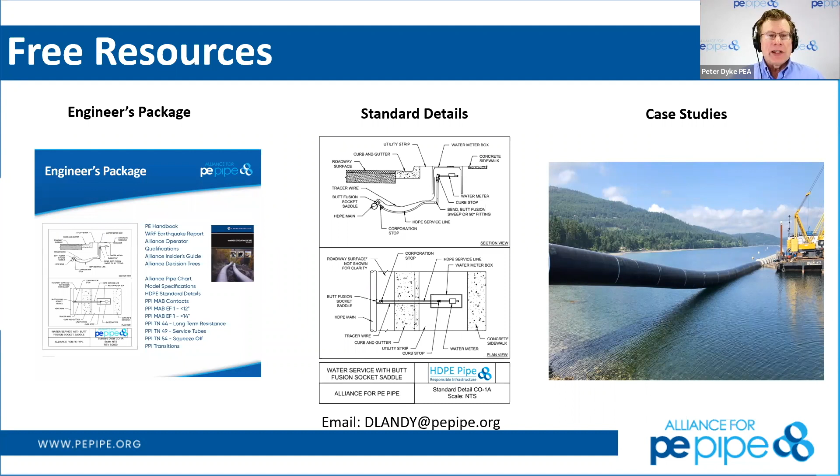Way back from New Zealand as we speak. So today, Mike James, please come on officially.

I'd like to introduce you as a VP with ISCO Industries, the largest distributor of polyethylene pipe. I'd also say, Mike, you're the largest fabricator of polyethylene pipe in the United States as well. Yeah, we have about 10 fabrication shops around North America where we fabricate structures and fittings, as well as all the pipe that we distribute and the fusion equipment to go with it.

How would people and why would people interact with you and your sales team, Mike? Just give us a for instance of your role in this whole process.

So we're obviously hyper focused on HDPE piping systems, and we provide a total piping solution when it comes to your project. If we can engage with the engineer early on in a project, we can add more value early on. We can help you with the technical side of it, the specs, the design of it. We're not going to stamp things for you, but we'll help guide you on what's available today for that. Then we'll walk you through the whole production side of things and the supply side, as well as when you have to get it installed. We have lots of contractors we work with that we can refer, and we can educate them as well. We can provide fusion training services. Our job is really to make sure that the right pipe gets designed and installed correctly all the way through the whole process.

And you know, there's a place like Jackson, Mississippi. Peter, did you see the news today on that? 5 million gallons per day leaking. I hope they're on this call. We need them on here as well.

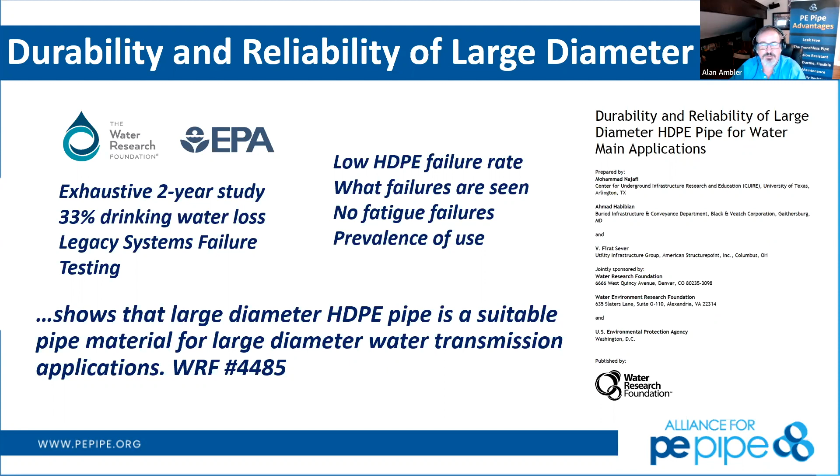You may say, well, this stuff sounds good, but is it really reliable? Richard Kolosik, could you come on and tell us about one of the ways we like to distinguish ourselves, Richard, compared to PVC, since it's the other plastic pipe. PVC is a good product, it's not as good as ours, but PVC suffers from cyclic fatigue. So you hit it, it's like a pitcher's arm. You hit it, throw so many pitches, eventually the arm's going to wear down. Same thing with PVC, Richard.

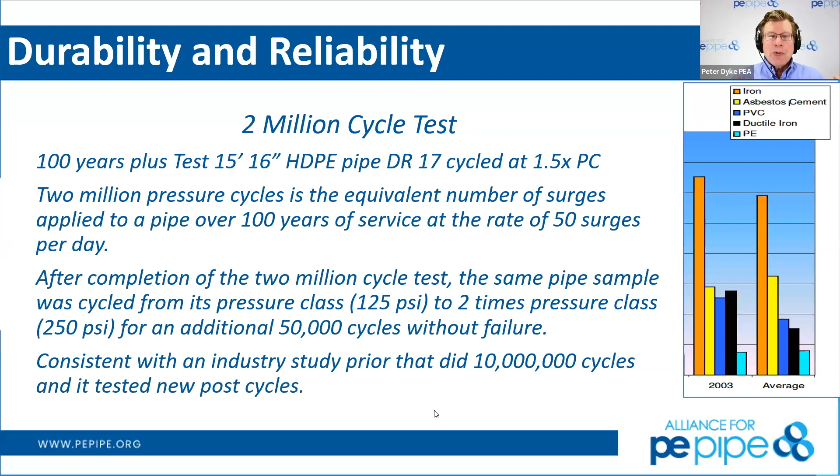But it was all completely done with zero failure, so we had to stop the test because it was just getting really, really expensive. I think it was about a $250 cost per site or per sample. So it was a little spendy, but it really told us a lot.

And with other products that were tested, there was failure. The rigidity versus ductility differences between the two really emphasized itself in this test. So it gave us the confidence to put a multiplier, not a reducer, for surge effects.

So Richard, a mid-sized 250,000 person city, how many cycles would they see in 100 years? Probably what they would typically see is about 500,000. It's 54 cycles a day is what we averaged across the utilities. We surveyed 435 utilities and had an average number of about 54 cycles per day. And it depends - if it was a tower system or a pumping system, that was reduced for a tower system type application. But you can do the math yourself for 100 years.

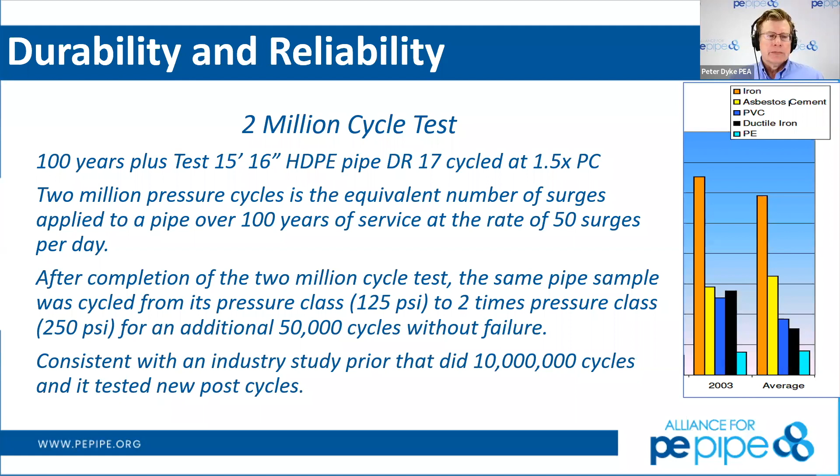Next slide, please. Thank you. All right, so Alan, why don't you take over here for a couple of slides and talk about design that leads to the durability and reliability of the product.

Sure. So some of the design aids that we have available for you - Pete mentioned the engineer's package previously. AWWA has a water main, the M55 manual, for all things high density polyethylene pipe. There's also ASTM standards. A lot of those references are included within this engineering package we've got, but there's lots of guides for you to utilize, whether you've never designed a high density polyethylene project previously, or if you have a whole lot of complicated installations requiring additional information.

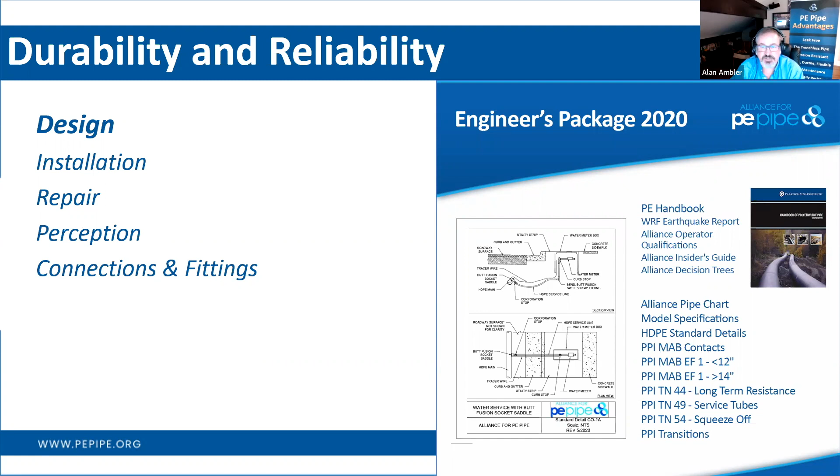So some of the Bible of polyethylene pipe happens to be the Plastic Pipe Institute Handbook on Polyethylene Pipe - 16 chapters covering everything you might want to know about polyethylene pipe, including material properties, pipe and fittings, how those are manufactured, and design of the underground system. We even get into above ground applications, looking at thermal properties and restraint and the strain or stress that may develop in the pipe wall at those restraint locations as the pipe undergoes thermal expansion through heat during the day or changes in weather.

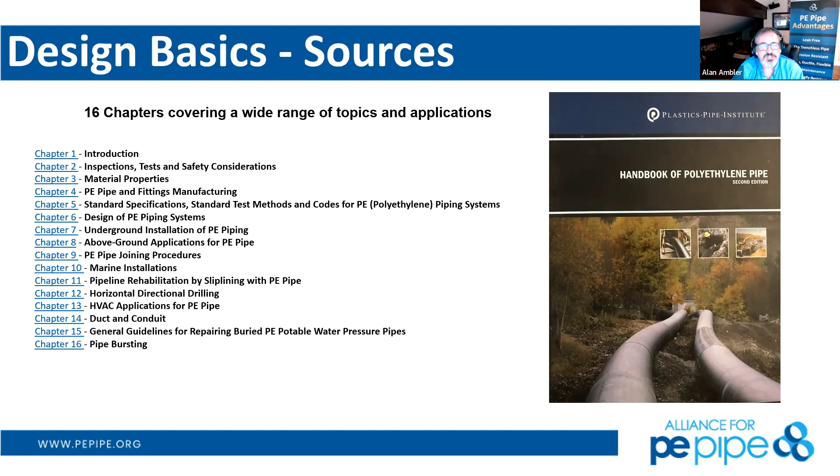Marine installation, slip lining, horizontal directional drill, pipe bursting, and all sorts of other things. So the Alliance itself maintains additional spreadsheets that can be made available to you. We want to know a little bit more about your project before we turn over a calculator to you, so definitely make sure you send us a note and include us in the development of your polyethylene project as we go.

One of the most interesting things that Pete and I have discovered over the past several years is historically trenchless technologies such as horizontal directional drill were one of the gateway drugs, so to speak, for polyethylene use at municipalities - just a first introductory use if you've never been able to use polyethylene in your system before.

But over the past couple of years, we've started to hear more from you in the audience as to what your projects are, and open cut has become an overwhelming installation method for you. So we've put together a simple design window for you.

So if your pipe is between DR7 and DR21, has an approximate burial depth of 2 feet for no H20 loading - that's a box truck loading - or 3 feet for regular live loading condition on top of it, and then buried down to a max height cover of 25 feet, this is an approximated design window corresponding with the new M55's basic installation method. There are other installation methods for which you'd look at an engineered method.

M55 will help you walk through that, but we also have calculators for going to deeper depths or thinner wall pipe as we move through that.

As you start to incorporate larger diameter pipe, remember the footprint on everything expands. So if we're looking at 48-inch pipe, we want to make sure we've got the appropriate trench width and trench stabilization as we go through, which is oftentimes more important than the distance for the pipe itself, because we want to make sure that trench is safe and supported for the workers getting in and doing that work.

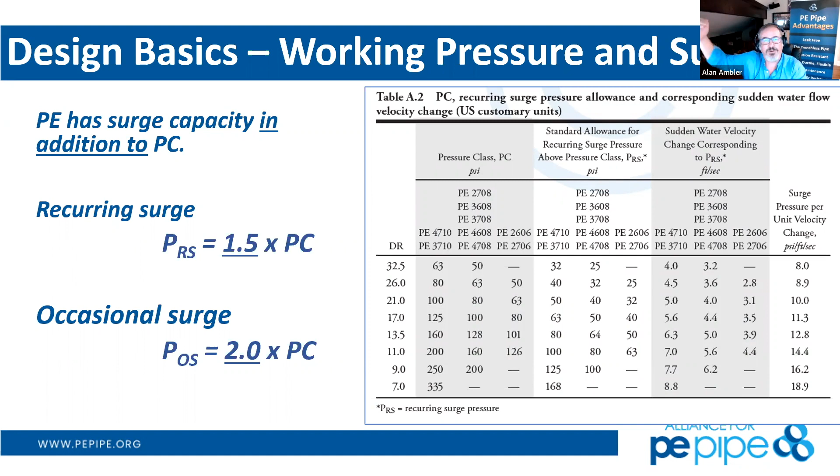We worked with a municipality in the New England area that had 190 psi pre-stressed concrete cylinder pipe. I said, hey, what's your pressure variation? They put a surge gauge on that pipe for a while, and it basically stayed 190 flat for a long time. So I wouldn't have any issue saying, look, you're operating at 190 psi, you probably should consider a DR11 at 200 psi. Plus you have all these other conservative factors right on top of that for you.

So getting back to installation, some of the durability and reliability—some questions about installation historically differ between HDPE versus more rigid materials such as ductile iron and PVC. Some are going to be geared towards the lack of ease of use of this product, tapping and fusions.

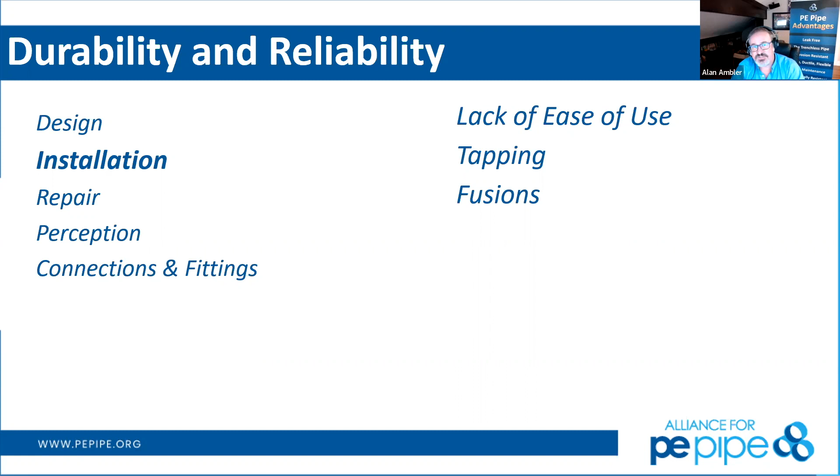To highlight some of the viscoelastic behavior of high-density polyethylene, it provides us that extra durability and ductility during installation. So our contractors can actually work with this pipe material sometimes way easier than they can with a much more rigid pipe. Tapping is going to be similar to what you'd see with PVC pipe, where we want to tap through a fitting that supports that pipe material as it goes through.

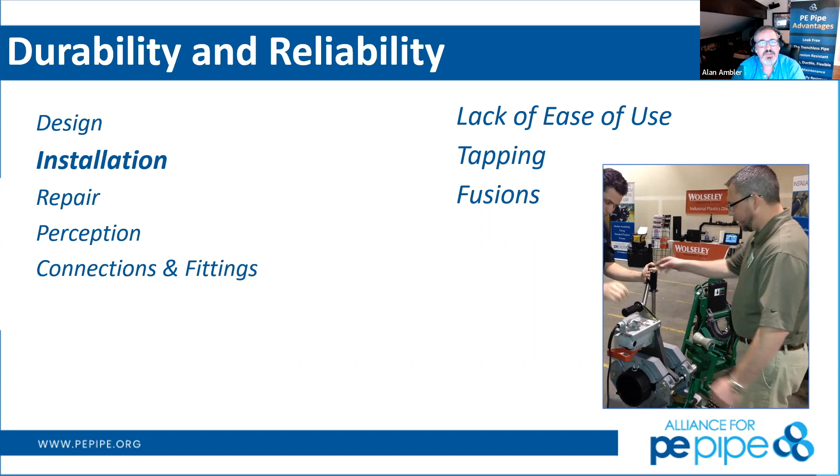And then fusions—like everything, we need training. We need training and qualified trainers for butt fusion and electrofusion, to understand how to perform that fusion safely and effectively. Pete and Mike are going to come on and talk a little bit more about that too.

Mike, you showed that video before the show started of those guys up in Canada fusing over 100-inch diameter pipe. That's not the guy that was just trained on a McElroy 28 machine—tell us about that process. Yeah, those weren't. Those are some of our veteran fusion technicians that actually went to Tulsa and got trained, and came back and performed on that job.

But talk about training—last week was a good example. I was in Colorado last week, and we trained a lot of people who had never touched polyethylene pipe. Some had, some hadn't. We can walk people through the very basic training, small diameter, simple fusions, all the way up through the most complicated training there is.

Even in-ditch—I see a question from Scott Funk about how do we perform in-ditch fusions and so forth. We have specialty equipment and technicians that can come in and help you, either teach you how to do it, or we can come in and perform that fusion as well. So we can help you on all aspects of training, not just butt fusion, but electrofusion, sidewall fusion, socket fusion, the whole 9 yards.

Yeah, the industry understands what's necessary to ensure a proper fusion and is happy to give you that information. Mike James and his crew are standing by all throughout the country to help you in any fashion that you need. So we've had a couple of questions roll in.

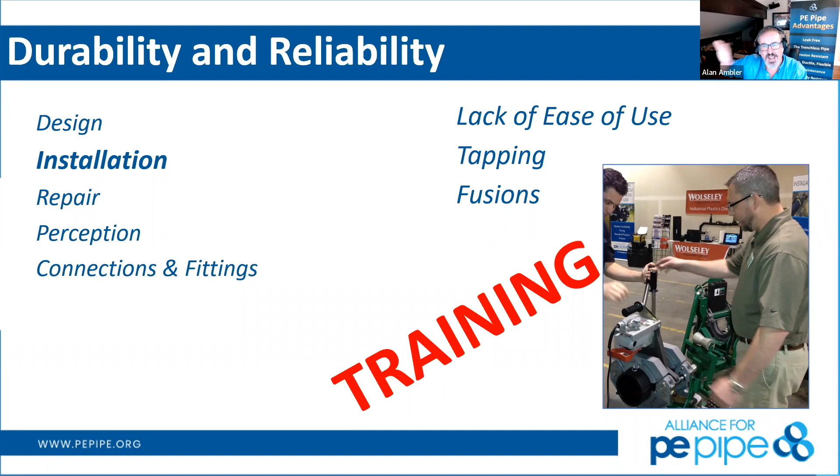Again, this makes it much more applicable to you when you ask those questions, and continue to roll them in, especially as we move from pre-slides of design and information to actual handling and manipulation of the pipe as we go through. So I'm sure you're going to start asking more of those questions, and keep it up.

So repair becomes one of these things that we do need to talk about. High density polyethylene does not suffer cyclic fatigue, does not corrode. So quite a bit of the industry has said, hey, after you get this installed, it's really not going to be a long-term problem for you. But then there's also third-party utility damage, and maybe some contractor error at the beginning or what have you.

So the Municipal Advisory Board of the Plastic Pipe Institute is a group of municipal representatives that live and breathe the adoption of high-density polyethylene into their systems. And they've come up with quite a lot of different helpful resources here.

I'm showing you the MAB Basic 04 manual itself. This is a laminated sheet tied into a field workbook that can be thrown in the back of the truck for the operator. It goes through a series of decision matrices to show exactly what's available to that operator at all times of night.

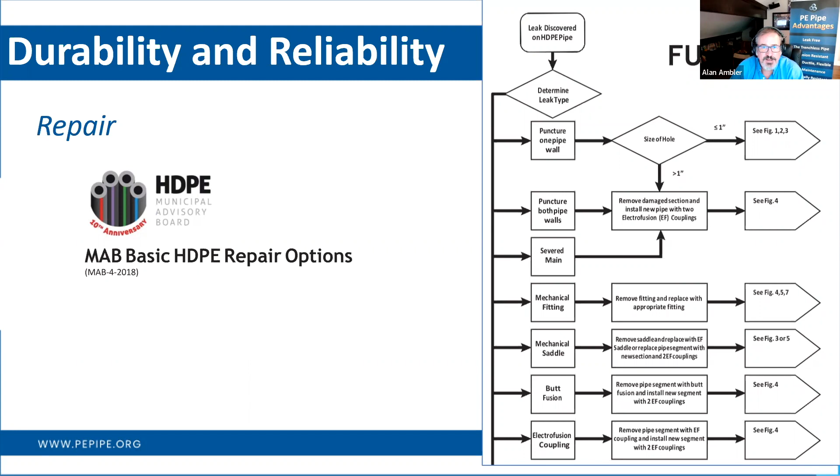Of course, your water main failure doesn't happen at 9 a.m. on a Tuesday after you just finished your coffee. It happens Christmas Eve, Christmas morning, 2 a.m., some type of time like that.

So a mechanical spool piece is one possibility to be able to put through this. They have mechanical connectors and adapters very specific to high density polyethylene that can come in at 2 a.m. and be able to slap right on that pipe. You shut it down, shut the valves down, cut the pipe out, and put that spool piece back in where we know we need a piece of high density polyethylene pipe that's been gouged or further damaged, that has to be removed, that we can't put a repair clamp around.

A flanged spool piece is another method to remove larger sections of pipe. You can also do that with an electrofusion spool piece as well. By the time we get down to electrofusion, it's important to have all the water shut off within that pipeline as we run through, so no fluid control can come through that section.

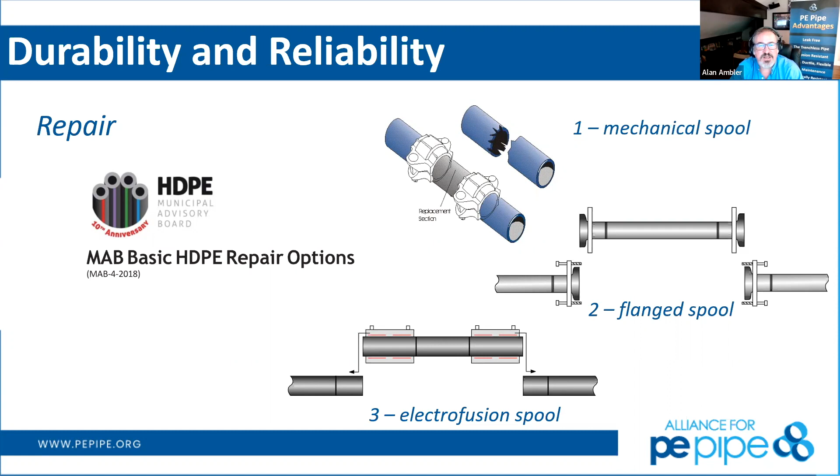Some of these other pieces and spool pieces can be done at a later date as well, that's not an emergency. If you've got a repair clamp, you can slap it on the side of that pipeline at 2 a.m.—the same repair clamp you're used to putting on other pipe materials can be used here. This translates straight up into larger diameter fixes and repairs as we go through.

So I'll walk you through this project that we've got going on. We have a repair required on a larger diameter piece of high density polyethylene pipe. I'm unaware if that was due to third party damage, maybe a pipe gouge on the outside itself.

But if you translate and start to look at the installation of the fitting from when it arrives at the job site, wrap around that location of the repair we need, and then translate that out further, we know larger pipe requires more force and potentially has larger pressures going on the inside.

So this particular adapter also has the belt and suspenders approach that engineers like, in order to put more thrust restraint on either side of that fitting so you can tighten those bolts up, secure that, and make sure that fitting isn't going to translate or move after it's been installed. So the industry has thought through quite a bit of this, and the tools available to you are robust.

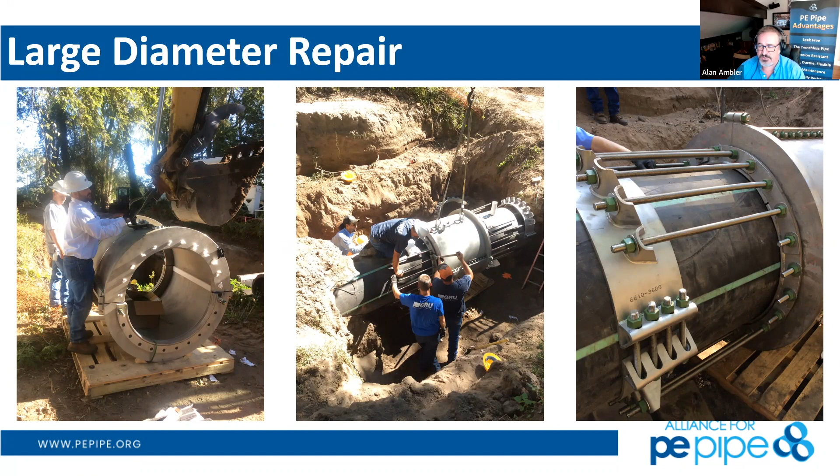Go ahead, Pete. So on that previous slide, Hymax, Alan, makes band clamps up to 2 meters in diameter, which is the same size as McElroy's Talon 2000. So we're making repair clamps to very large sizes.

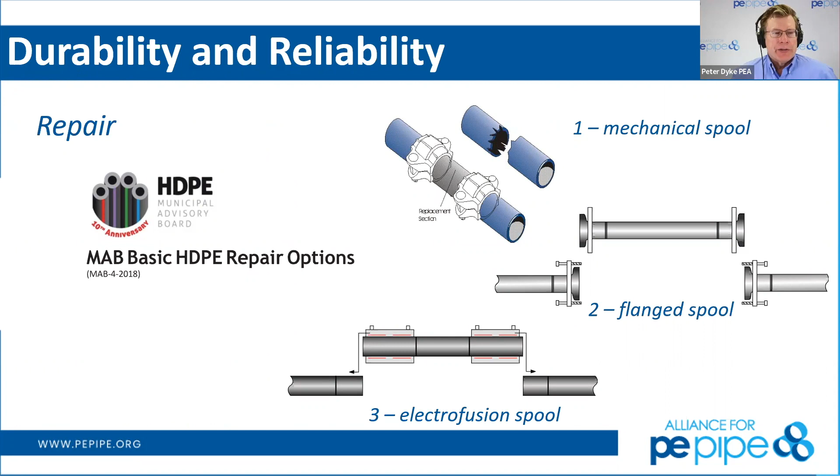Absolutely. So perception, we want to look through—Pete, if you want to stay on with me, we can talk about cost. Here's a good example of the City of Sunrise project that you can narrate through the video here. It looks like 12-inch, 44,000 linear feet of DR11 pipe that saved quite a bit of money.

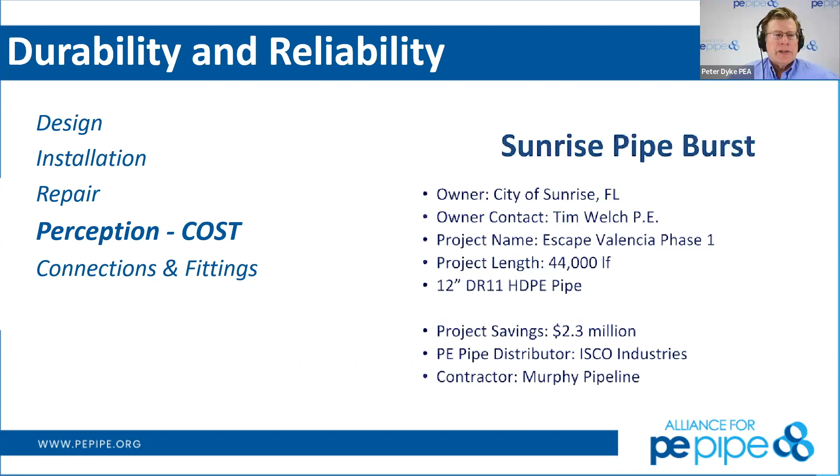Yeah, so this owner—think suburb of Fort Lauderdale—was saved over $2 million on one small 12-inch pipe burst, Alan, by going polyethylene.

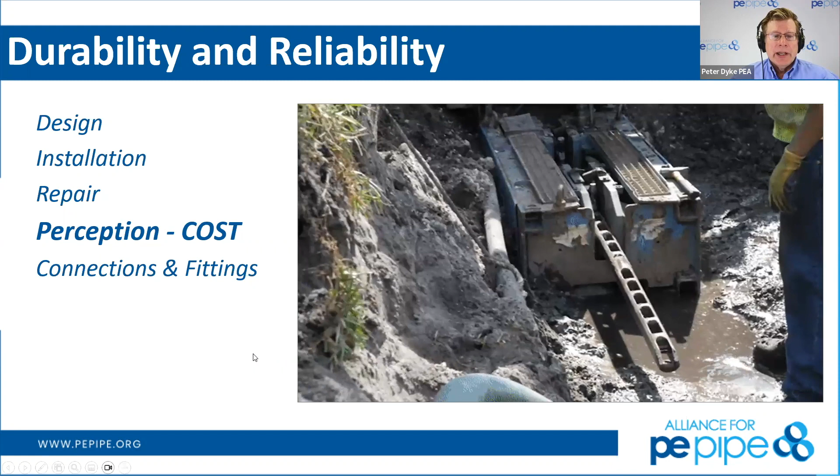It was originally bid as ductile iron, and that's what the utility was very comfortable with, yet they were using polyethylene in gas all day. The contractor came in and said, I can do it a lot less expensively and save you a ton of money if we go polyethylene. So they did, saved a lot of money. This is a story we hear all the time.

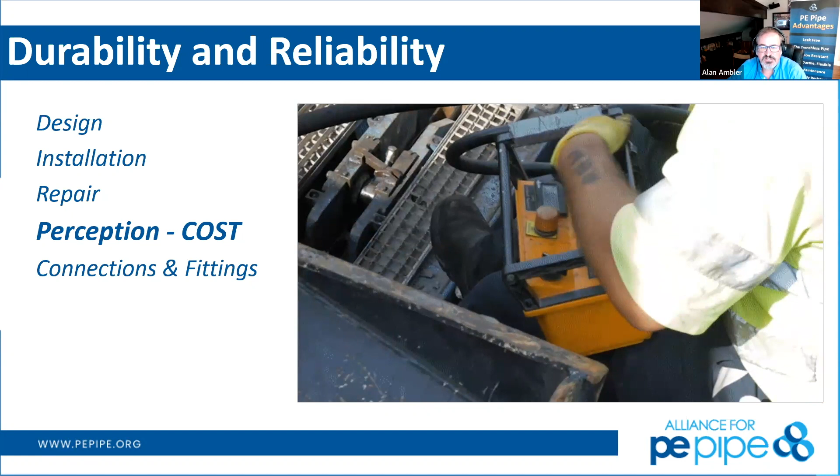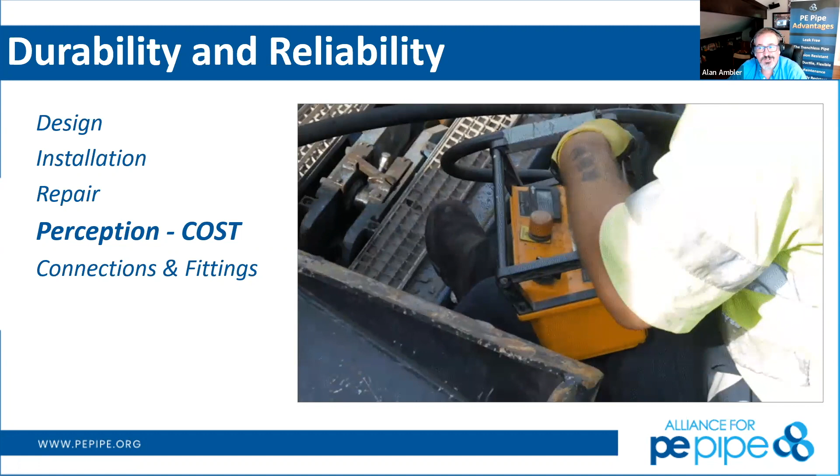Unfortunately, I didn't have any good videos of this instance happening in large diameter, but I will work on that for next year. For pipe bursting, they're getting well up into 36 inches, and the equipment is there for 54-inch. The industry itself is chomping at the bit to go for a 54 or 48-inch for pipe bursting. So much like all trenchless projects, once we see a more efficient and effective way to install or rehabilitate pipe, we're going to see that reaped reward of cost savings, environmental savings, less social impact, the whole 9 yards.

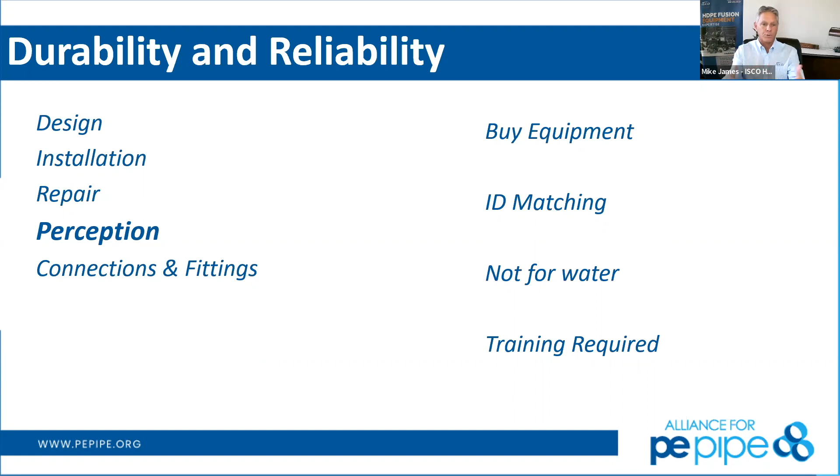I think as we get into bigger pipes, for sure, we just haven't played in that space for a long time. There were people last week I was talking to who have designed steel pipe their whole career. That's all they know. So it was a big eye opener to them last week when we started presenting information to them.

Alan put on here, not for water. For many years, speaking of transitions, utilities would use it for sewer because that was safe, but not for water, right? Well, nobody talks that way anymore. We have C901, we have C906. It's accepted by AWWA, NSF, ASTM. So we're very proud of that, but it's just part of the deal, the cost of getting into the game.

And then our competition loves to say, oh, you need training. Like, you don't? So you're going to teach somebody in a trench? Okay, we're asking you to have somebody earn a card in steel, Alan. How long does it take to become a welder in steel? That's a great question, Pete. I don't know the direct answer, but one would assume it's certainly longer to be able to work with a flame and work with all sorts of other metal bonding. It's a significant apprenticeship.

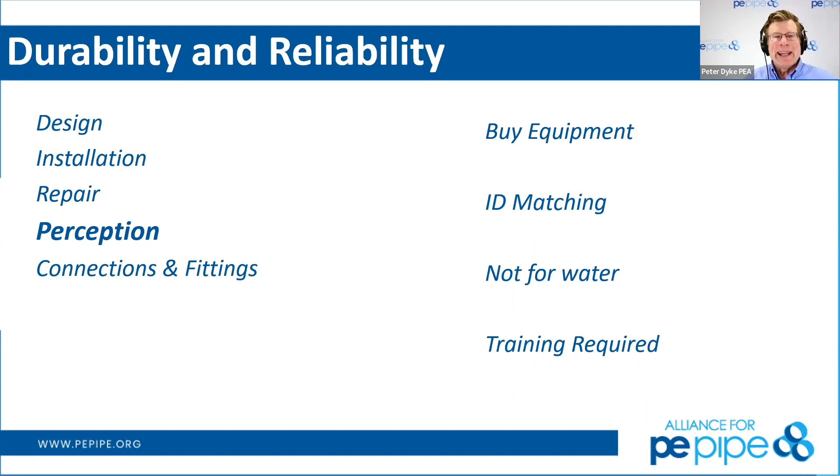And for us, we're asking for a day on small diameter. Mike told us that his crew went to learn how to use that Agru machine, they went to Europe. We're not asking for that kind of commitment, but if you're going to run polyethylene in your city, you're probably going to want to train one of your crews, and that could be a 1 to 3 day commitment depending on diameter. Absolutely, I've done it before with City of Casselberry when I was there previously, and we do it with municipalities all day long. So we're going to look at connection and fittings now.

Very good observation, Mr. James, about whether or not the bead and the fused pipe for high density polyethylene was in fact a fully restrained system. A big difference when we show on the roadshow floor, after we fuse a pipe up, I immediately challenge guys to try to hold the other section and pull it apart. If you were to do that with a 4-inch Bell and Spigot PVC pipe, you could probably pull it apart. By the time we insert that Bell and Spigot pipe, there's none of that tension forces that stops it from being pulled apart. The joint on high density polyethylene pipe material is all high density polyethylene throughout the entire structure of that joint. So that is a fully restrained joint.

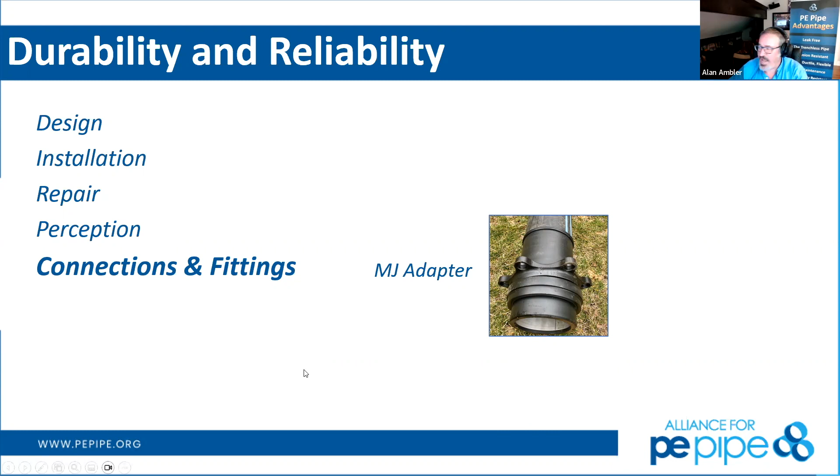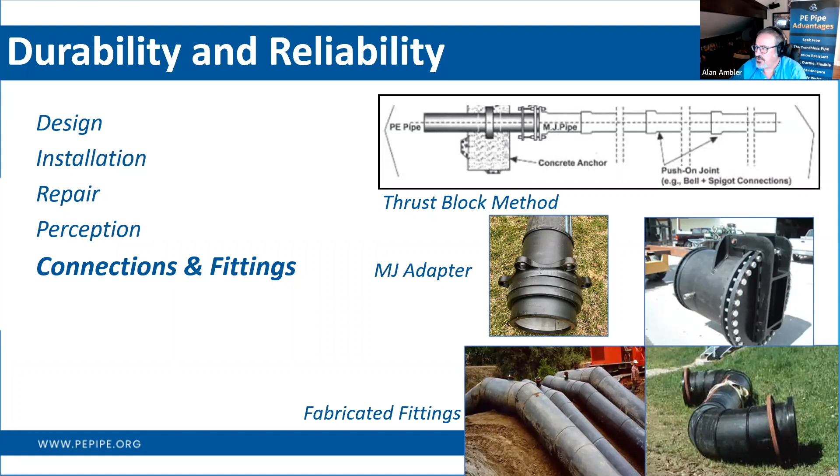Now, we can't have that all throughout the system. We do have to go and attach to other things, and that's when we have MJ adapters. We look at thrust blocks primarily in the locations where we are going to attach to Bell and Spigot systems, because we do not want to pull that Bell and Spigot out of that system. So we do have other adapters for you to be able to fuse onto your pipe, or use flange adapters, fuse on there as well, or mechanical fittings that give you that thrust restraint as we go through. Quite a bit of what Mike James and ISCO can do for you, as well as fabricate some of these in their areas as necessary.

Yeah Alan, thanks, if I can jump in. When Peter and I started talking about big pipe a couple years ago, 36-inch used to be considered big pipe, but today we're using 48, 54, 63, 65-inch. I think that's an everyday occurrence, not just an ISCO thing, it's all of our industry. Much more common to see those sizes and diameters. And even larger than that today, when you got Matt Danish on the phone, they can make up to 3,500 millimeter pipe. We see that globally as we go around the world. They're using bigger pipe around the world than we are today in North America.

So Matt, I just got a question on the issue of, if you go bigger and you're constrained on your wall thickness, by definition you carry less pressure. What kind of pressures and what kind of wall thicknesses are you seeing on 80 and 100-inch? On the 80 and 100-inch, we're looking at up to 80 PSI for pressure for like an SDR26 pipe. And really, it also depends on the temperature of the application.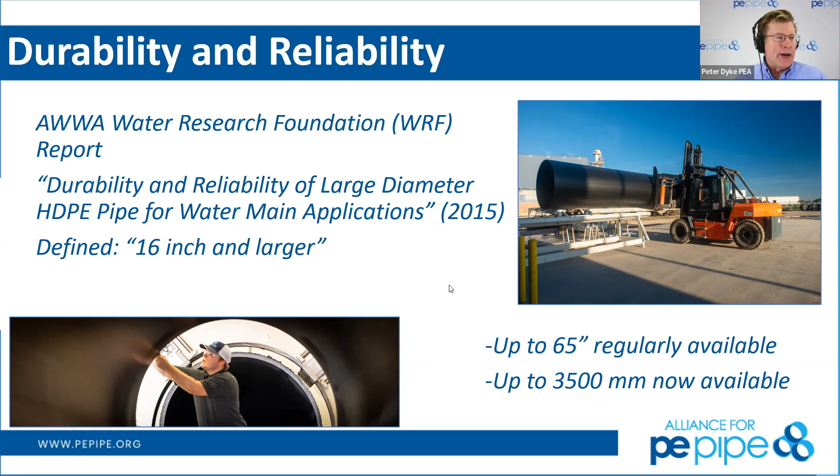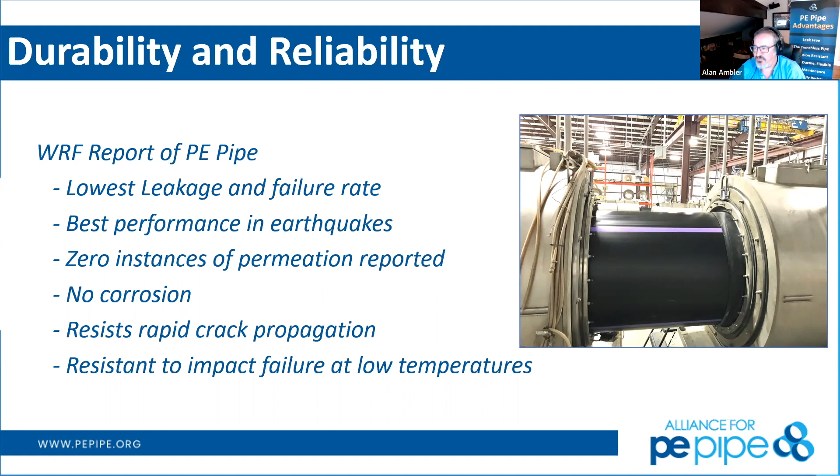So we looked at the lowest leakage rate and failure rate of all pipe material within this WRF report. Something that's always been inherent to HDPE and its self-restrained joints is our performance in earthquakes. We talk quite a bit about that, but it's very specific to seismic regions, so most utilities operating there understand what pipes will do for their area. It also resists rapid crack propagation, which is essentially an impingement or failure running across a fused joint. The advanced resins of the 4710s and above have solved for that, stopping it from running across fused joints.

So here's some standards for us. AWWA C906 goes from 4 inches to 65 inches. An ASTM standard gets up into that 3,500 millimeter pipe, which is 10-plus feet as we move through there. In some installations, even though Matt mentioned 80 PSI, some force main applications are still low pressure, in the 30 PSI range. We'll show you one later, a 54-inch horizontal directional drill where the actual operating condition was in the 35 PSI range.

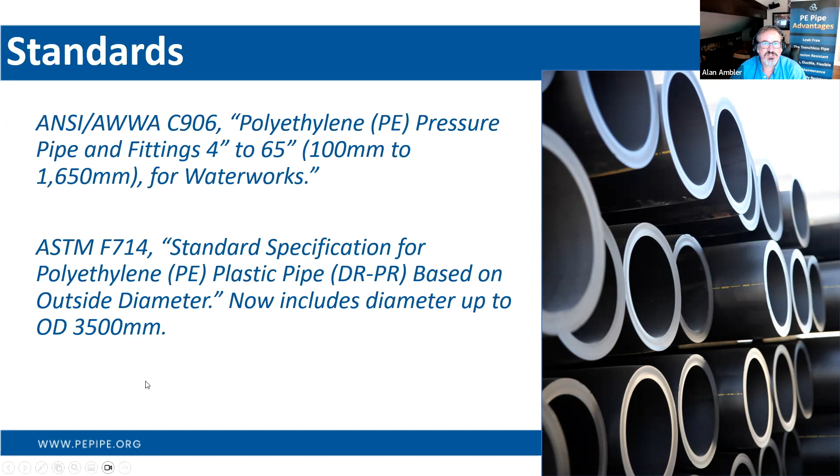They did select a higher DR for that 54-inch pipe just because they were putting it through horizontal directional drilling. So be aware, sometimes the forces of installation are higher than the operating forces when using trenchless methods. That's one of the things that's pushed us to standardize DR11 for potable water, even though it's rated 200 PSI and most water systems operate between 55 and 70 PSI. And then DR17 for sewers, even though DR32.5 would work just fine as a sewer pipe in an engineered backfill.

So Pete and Mike, if you guys want to come on and talk about some of the resin advances, I think this is where this really takes off. Sorry, caught me answering some questions.

So yeah, the resin advances, Alan, are really quite wonderful. We've seen them all up and down the line. And if you've attended any of our webinars, you know we've addressed the chlorine issue, we've addressed slow crack growth, and now we're very excited because we're now able to make thicker wall pipes. We're going from a 3-inch wall thickness, Mike, when we started talking about this, to now Matt Danysh making 6-inch wall thickness pipes. That's incredible. That's not happening every day, but certainly we're seeing 4- and 5-inch wall thicknesses.

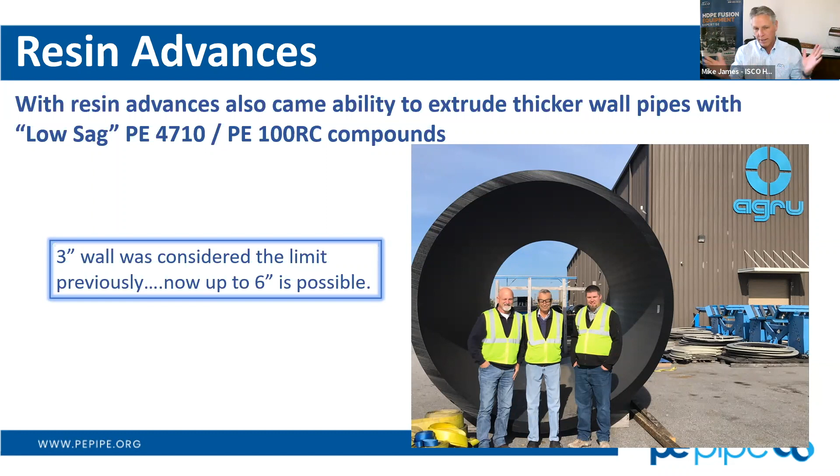Look at that picture, right? That photo we're showing, Sean Gallagher's on the left-hand side. He's as tall as I am, 6'1", 6'2". That's a big pipe, going to Utah, the Steinecker project I believe. When I looked at that originally, I thought that looks like 3-inch thick pipe. He corrected me, said no, it's almost like 5-inch thick pipe right there. Big diameter, heavy wall pipe that we couldn't do 10 years ago here in North America. We're doing it today, which is awesome. So the change in the resin, the change in the extrusion capability, all of that today allows us to make bigger, heavier wall pipe.

Very exciting. So here just shows the resin capability, we're on the 4th generation resin now. And Mike, we kept the 4710 designation when we added the greater chlorine capability and the better slow crack growth resistance. What are some of the things on the horizon with resin that we might see in the next 10 years? Well, you see how we've graduated today, right? We're going to continue to graduate. And as I look at what's going on around the world, PE 100 resin has been around for a decade or more.

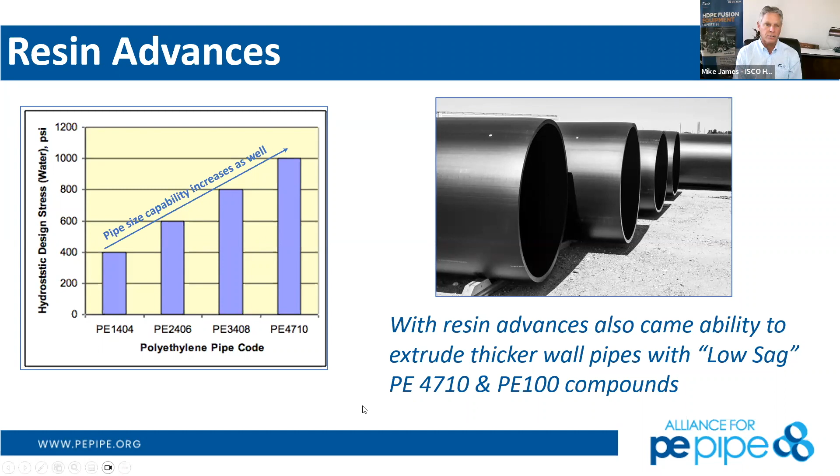That's what they use in Europe and around the world. They're now using PE 125. I know our next generation resin is coming right behind that as well, which will give us higher pressure ratings. And then with the low sag resins that are out there, we'll be able to produce even bigger sizes.

Great stuff, Matt. The factory you have, this isn't a picture of it here, but the factory you have in South Carolina, right? You can even extrude long lengths of pipe right into the bay there. Is that correct? Right, and depending on what the customer needs are, we can make it longer. If they can get longer trucks in, we can make it up to 53 on some truck beds, allowing us to go up to 53-foot lengths. So all that can be prearranged, just as long as we have trucks that can handle longer lengths.

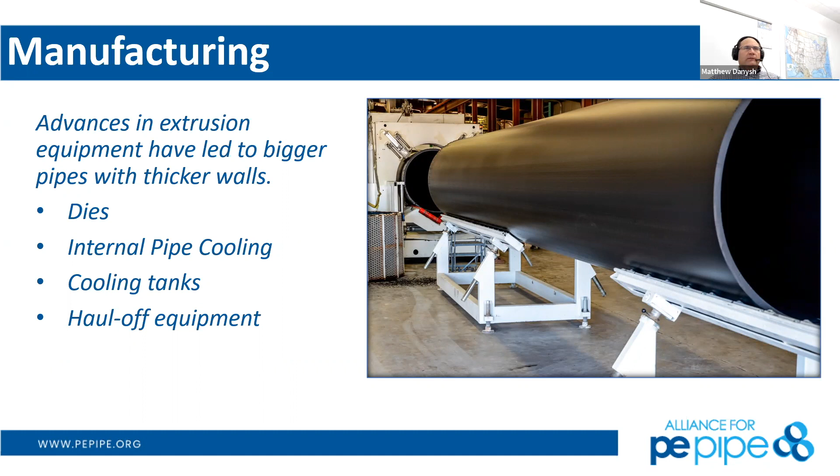Hey Matt, let's talk about some of the testing that you do at the factory, because if I'm an engineer designing a project with HDPE for the first time, how do I know that you're making quality pipe at the factory? So quality of the pipe starts from the beginning with raw materials, going through all the testing on the raw material to ensure that it meets all of the requirements, and then into the production of the pipe.

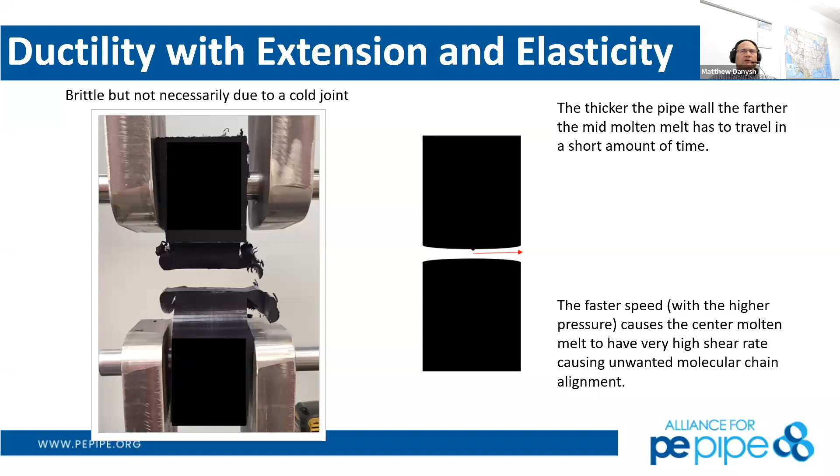This diagram to the right shows that as you get to thicker wall thickness, it changes the physics of the welding operation. When you look at joining the two pieces together, the material in the center of the wall thickness has such a larger distance to travel. That travel distance with time gives you the speed. Speed is not the friend for molten plastic - it likes to meander very slowly in a more laminar flow.

When you start to increase that pressure of the weld, you get velocities that exceed the fusion pressure and time under pressure. So we really encourage people to look at their welding procedures and parameters to ensure that we have good welds. We also can do different types of tests - these samples on the left are a constant tension load test where we can do tensile loads to test for stress crack of the pipe. And then there's also the old method of doing weld tests with the bend back test method, and the recording for a joint to ensure good joints and weldability in the large diameter pipes.

So I think it's safe to say, Matt, if you're a new engineer designing HDPE for the first time, there's lots of different test methods for the production - the resin, the pipe, producing the pipe, tensile impact tests.

And then when you get it into the field, we can perform quality fusion tests in the field and qualify each operator, each fusion machine. We can help you design those. So if you reach out to us, we'll help you with your specifications. We really want to make sure that the pipe gets installed correctly all the way through the project, and we've got the tools to help you with that.

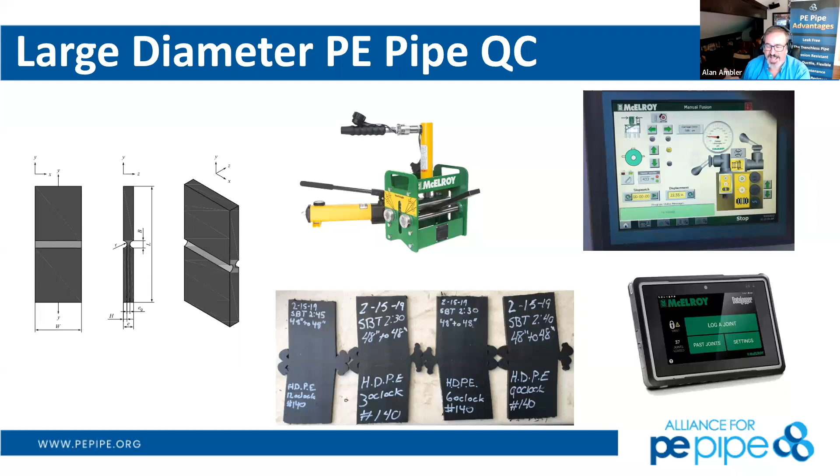This part of the process always amazed me, Mike and Matt, because as a civil engineer, I was really focused on installation, making sure the project was managed, making sure we had what we needed to do, getting a good construction price. And then when I started to learn just every bit of testing that you as an industry do to meet ASTM standards and the Hydrostatic Stress Board, my eyes were really opened up. It's amazing how many steps that material actually has to go through before it's even put on the job site. That gave me even more support through that process of being able to specify HDPE.

You're right, Alan. I would like to add too, while we're talking about testing and the importance of it, I think it's something that should be said about being pragmatic about it too, not overdoing it, so you don't boost your costs up. You don't want to have to do a fusion test every single day. You want to do it every so often, or maybe with every new operator. So if you just reach out and we have those conversations, we can help you build the right specifications for your project.

That's especially important in large pipe, Mike, because some of the heat up, cool down times might limit us to maybe 5 productive joints a day. And if we only have 5 productive joints on a 48-inch pipe, if we choose to destructively test one of them, we're gutting the productivity by 20% there.

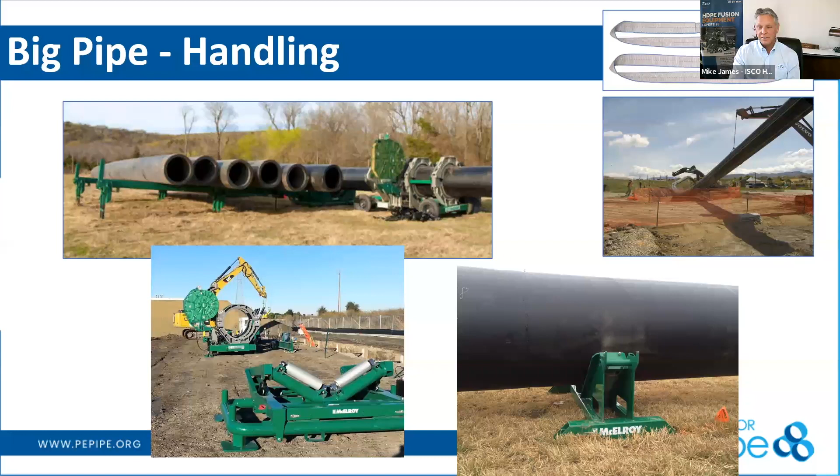Yeah, with small pipe it's a lot easier. Certainly with big pipe, though, as you're handling bigger pipes, you want to make sure that you're loading the pipe correctly into the fusion machine and have it lined up correctly for your fusion. McElroy's got some great equipment, as you see here, the track fusion machines T900 and T1200, that will speed up the productivity of your job if you're pipelining down a right of way.

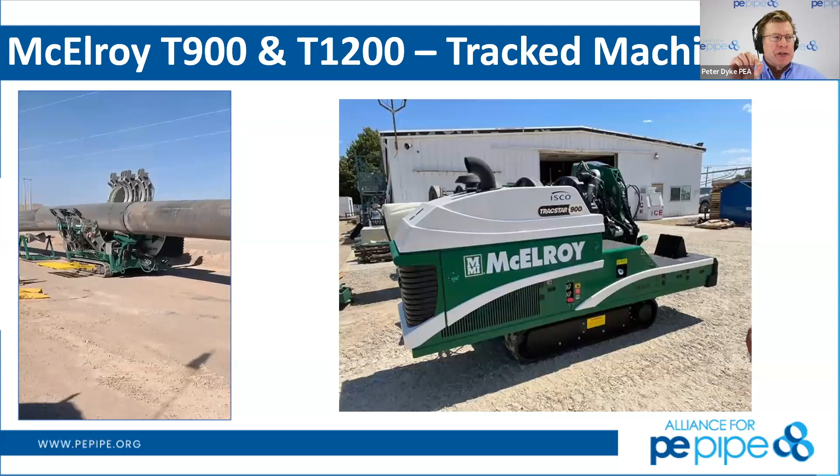Great tools. Mike, what do those numbers 900 and 1200 mean? Those are metric. A T900 will basically take you up to 36-inch diameter pipes, and a T1200 will take you up to 48-inch diameter. So 1200 is 1.2 meters, 900 is 0.9 meters. Got it. And here's the 1600, which is a 1.6 meter machine.

One of the things I noticed, Mike, that I don't really understand about how McElroy labels their machines, is when they get bigger, they go away from 4 jaws, they go back down to 2 jaws. Well, they have a machine, a 2065, that is a 2-jaw machine, but they also have its big brother, this one here, the 1600, that actually has 4 jaws, which gives you that extra clamping force. Especially if we're getting the heavier wall pipe, you need that extra clamping force to make sure your fusions are done correctly. Got it, thanks for explaining that.

Now Mike, we had a question about 20 minutes ago about in-ditch fusion, particularly with larger diameter. Tell us a little bit about that. Yeah, will do, Scott, thanks for the question on that as well. So the machines we just showed, most of those you can take off of the carriage and get them down in the trench like you see here. So when you have to do a tie-in fusion, or maybe even a repair, or you're taking 2 long strings and you have to put those together, here's a way you can do it. You can get down to 3 jaws. We can even get down to 2 jaws on some of our equipment that we manufacture, but you can actually take that down in the trench and locate your heater and your facer in there as well. So you can do in-ditch fusions. Now, the productivity is a little different.

You're not going to do them as quickly or as fast, but when you need to do a fusion, which is what we recommend versus maybe a mechanical fitting or a flange, you can do it with these machines.

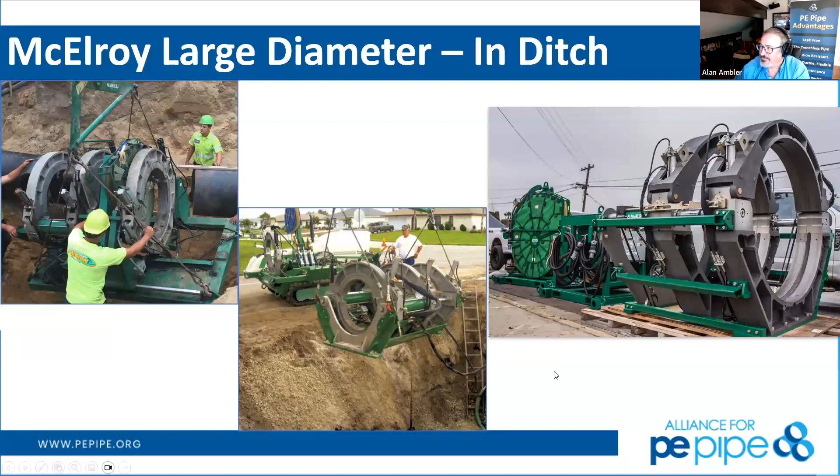So yeah, and when you're trench boxing and things like that too, these things all come up, and if you just pull us in, we'll have those discussions, and maybe it changes the way you're going to construct your pipeline. A lot of people have a methodology that they are used to using with stick pipe, and maybe it has to change when you use longer lengths with HDPE and you're doing fusion. So we can help you with that.

What you see on the screen here is the McElroy Talon, which is McElroy's largest machine. That's a 2-meter fusion machine that we have in our fleet as well. That's capable of welding up to 2 meters in diameter, down to 54-inch, I think is the smallest diameter. That's a track-driven machine that tracks over the pipeline. I think you'll see a couple pictures of it coming up as well.

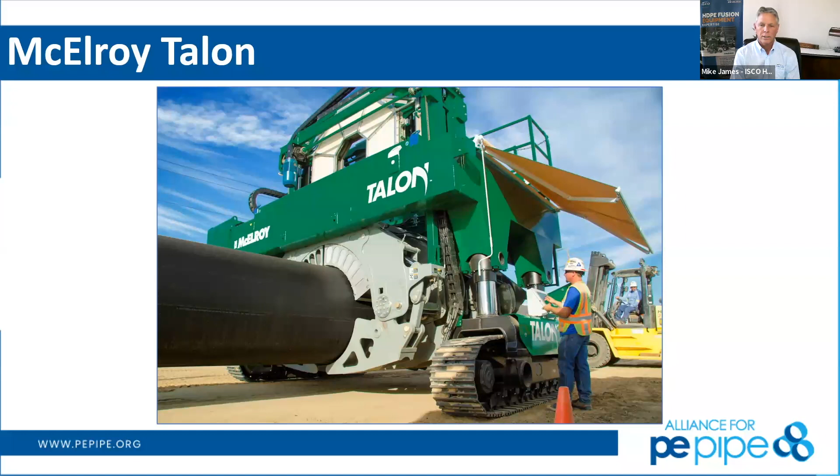So those are available. This shows the facing mechanism in it as well, and shows you kind of how big the machine is. It also comes with a data logger type operation as well, so you can track all of the fusions, but it's more of a push button control machine versus the standard hydraulic units.

One of the things, Mike, that always amazed me about looking at McElroy's design of their machines and the industry as a whole is just how almost idiot proof they make a lot of the steps of the actual machine, as to which it'll handle the cleaning, the scraping and facing the pipe to be able to get down to that virgin resin. And for those who may be questioning the pipe material and how come it's so strong at the joint, essentially what we're doing is we're getting back to virgin high density polyethylene material, just like the way that we would in an extrusion facility.

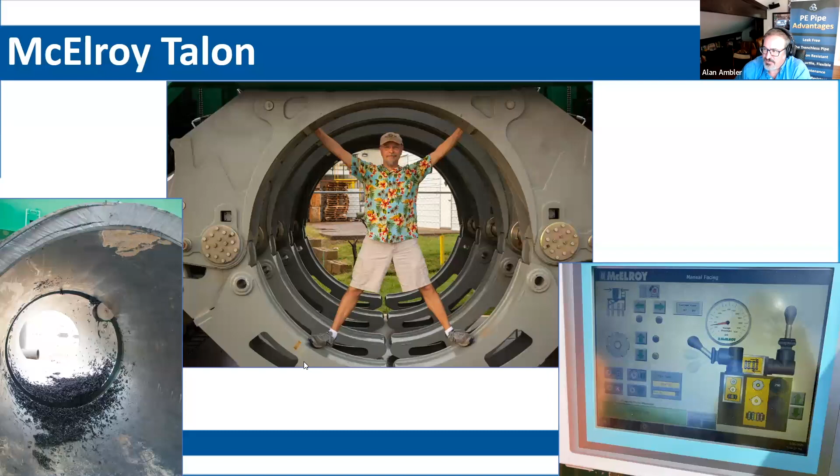So if we get back to that virgin HDPE resin, your pipe manipulation and extrusion at butt fusion, electrofusion, sidewall fusion, any of those is going to be exactly the same when properly handled. And that's how it gets us right back to a joint that is as strong, if not stronger, than the pipe itself. And the industry's ability to think through those steps and ensure that we are successfully fusing at every spot - you guys have really done a good job to make sure that HDPE does exactly what we want it to do.

You want me to talk about this, Alan? Yeah, please. Okay. Yeah, great.

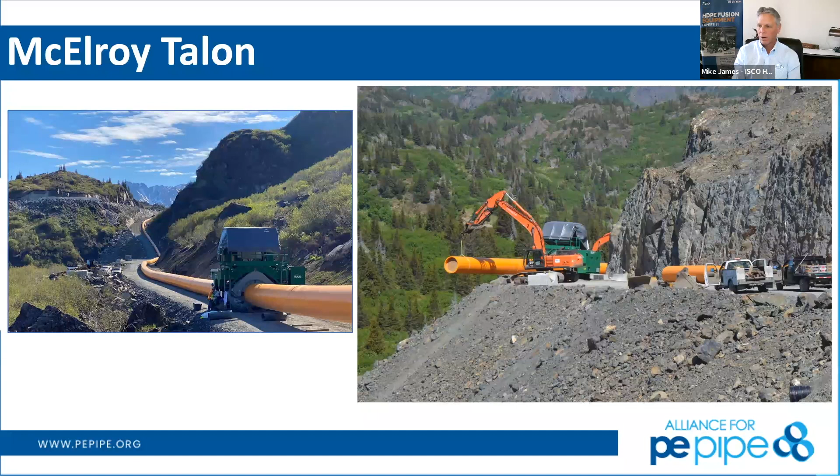We've got about 15 minutes left, everybody, and we're going to transition and shift into case studies. And before we do that, I want to talk a little bit about pipe failure.

Now, when we get into larger diameter pipes, that consequence of that pipe failure dramatically increases. We can combine some of that analysis when we know the pain of failure for a larger 48-inch diameter pre-stressed concrete cylinder pipe with some statistical analysis of that pipe design itself and pipe installation. And I look to Water Research Foundation for quite a bit of information across all pipe types.

They've got one on pre-stressed concrete cylinder pipe that shows specific generations of trying to install or manufacture as much of that pipe material as they can, to push the boundaries of manufacture itself, to where we have generations of certain types of pipes that are more likely and prone to failure.

So when you're out there looking at all of your pipe material types, just a desktop view, and we're looking at a potential analysis as to what your prioritization of your capital improvement plan is, because you can't go out and fix every darn thing all at once, then this is one of those gut checks or desktop checks that you could go through and look at.

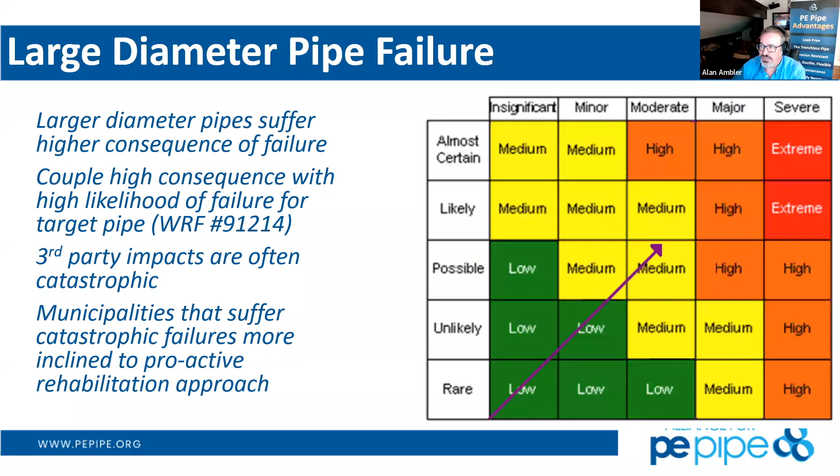But as we move into consequence of the failure, we start to look - these are the ones that are going to make that 10 o'clock news. These are the ones that they're going to be unhappy on Christmas morning that you couldn't put out good potable water in that manner. So these things are obviously going to connect and have high impact, and then hopefully drive your capital improvement program for you.

So that way they'll be able to make sure that the commission felt just as bad through the process of not being able to provide that potable water or collect that gravity sewer, sanitary sewer, force main through that, and realize that, hey, we've got this asset. It has this defined value, and let's go ahead and start to make sure we proactively repair that asset.

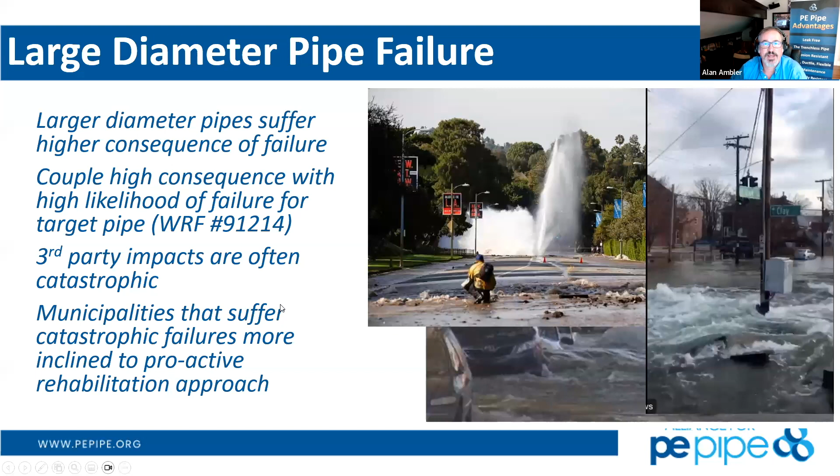So, Mike, this is one of yours up in ISCO, and I'll just outline the overall project itself. Southgate Sanitation District, 1.5 miles in a sewer tunnel. This is one of the prime questions I always ask, which is: is it a redundant line? So I've seen locations where there's not redundancy, or you have one pipe in and one pipe out from an island with 10,000 people.

In this one, 100% of the district's capacity, or 12.4 million gallons a day. So to translate that up, 12.4 million gallons a day is a lot of people - probably a lot of poop. That's a lot. You can't tell people to stop flushing their toilet, and about 100,000 people probably would make about 12.4 million gallons a day. Where else are you going to put it?

Existing inspection of the tunnel itself showed lots of failure through it. Decommissioning a main of this nature can be hard to do unless it's planned for appropriately with outage periods. Again, can't tell 100,000 people they have to shut their toilet off. But slip lining this accomplished the project at $8 million when a new tunnel could have cost $30 million.

So it's very successful. And go ahead and tell us about the fusion rate, which is always interesting, Mike. Yeah, this was 48-inch heavy wall pipe. So the fusions take a while, right? So a couple hours for the complete process.

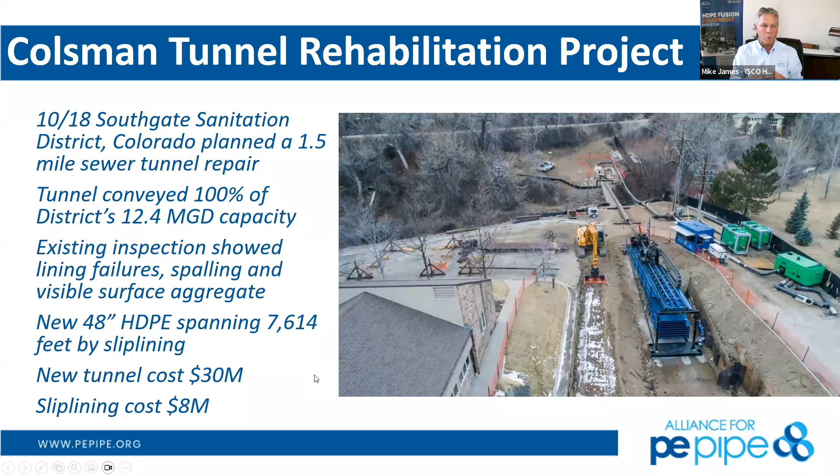The previous slide showed a directional drilling machine on there. We weren't drilling a hole, but they used the directional drilling machine you see in the bottom right-hand corner to actually pull the pipe through the tunnel. So it was fuse, let it cool, pull a section, fuse, let it cool, pull a section for 7,600 feet. It was about a month before we actually were able to get all of this pipe pulled through the tunnel. So you can imagine there were some sleepless nights, right?

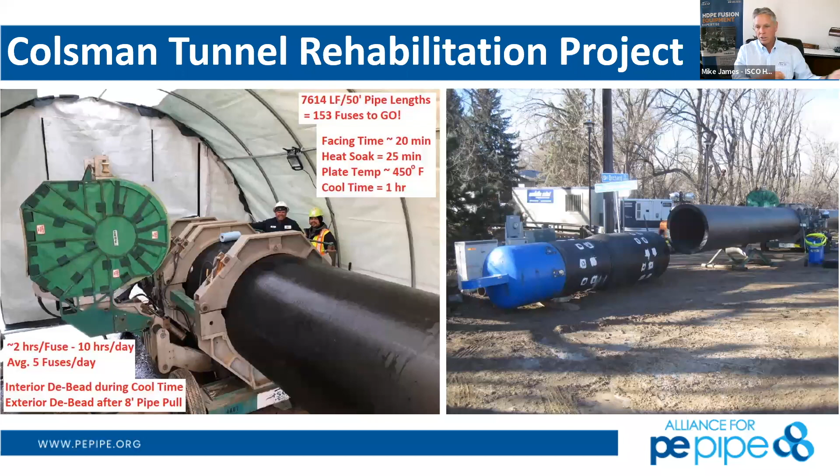But it worked great. The buoyancy factor helped a bunch. We were able to do all the fusions inside of a tent and control that, debead everything, hooked it to this giant pull head, and completed the project and got it done. So it was an awesome job using a directional drilling machine for an unconventional purpose, but a great slipline project. So the forces that would be experienced during construction of that need some hardened adapters and connectors.

We obviously don't want that swivel to be able to break as it's rotating through there, and it allows that horizontal directional drill string as it comes through to be able to swivel and rotate through it. So the people that install this do understand it.

Mike, I had no idea it was live flow condition, which is perfect. John Elway was happy, he could flush his toilet and everything worked just fine. It was in his neighborhood, but anyway, it was a great project.

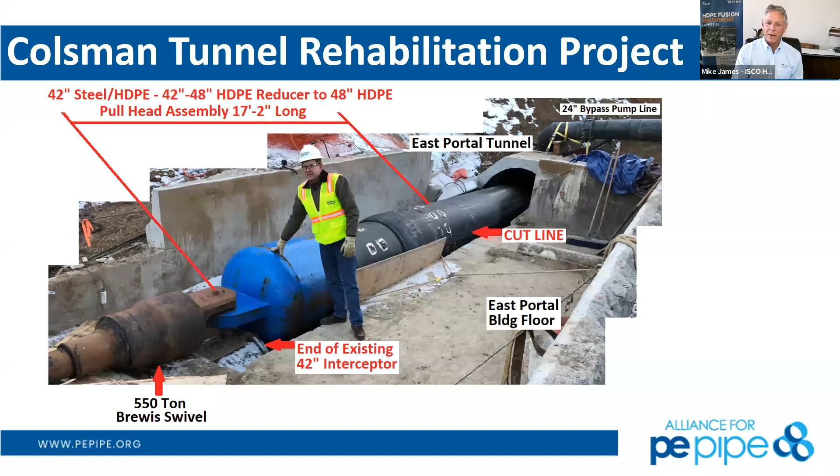Here's another one, Pete, if you want to talk to us about Fort Lauderdale. This is a large area as well, where we had pipe break and release of uncontrolled sewage within a very beautiful marina in that location. Yeah, the Intracoastal Waterway took a hit with millions of tons of sewage, Alan.

Polyethylene saved the day. With some engineers and smart folks in the polyethylene industry, the city of Fort Lauderdale decided to use polyethylene in a combination of 48-inch and 54-inch diameter horizontal directional drills throughout the area to replace the failing steel lines.

It was quite a project, took a couple of years to get through it. Two different contractors did the work. Murphy Pipelines, very prolific in social media, very educational. Find them if you can.

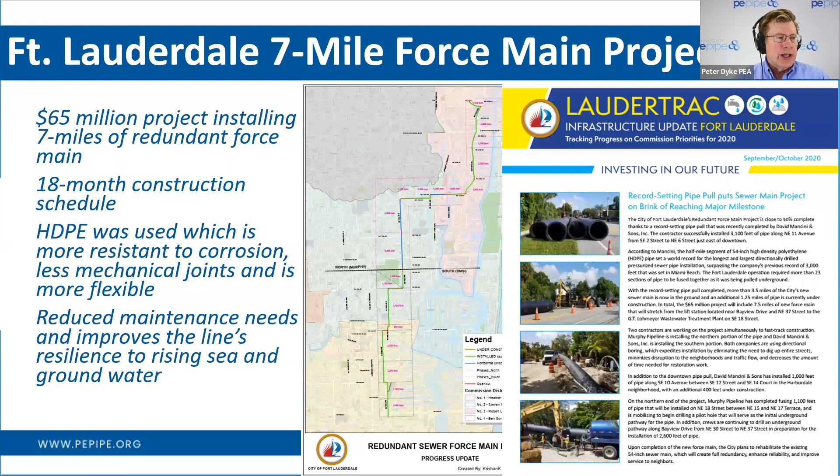I took a couple of videos of what it actually took to fuse up this pipe so those of you that haven't seen large diameter fusion can see it. This is Mr. C working with 54-inch polyethylene. On this fusion machine, he's got heavy equipment to move the pipe in and out of that fusion zone.

That, Mike, is one of those 2-jaw machines you talk about that Murphy Pipeline rented from ISCO Industries. Or no, maybe they bought that one from you guys, because I see their logo on it.

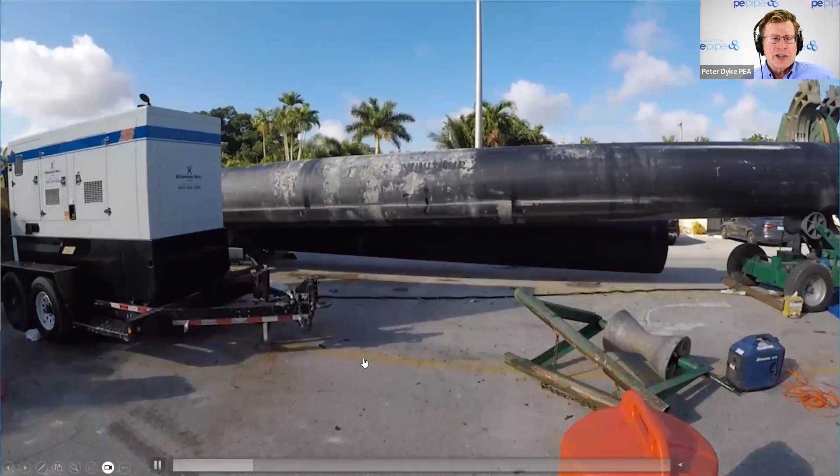This image shows what it's like. You've got to keep that pipe at elevation because you don't want to create torque in the fusion zone. So these guys have a McElroy pipe stand, and they adjust its height based on what they need.

This takes two guys, plus another guy, a third guy, holding up the pipe string while they adjust the elevation of that roller. That allows them to move that string once they've done a fusion so they can put in the next 50 feet.

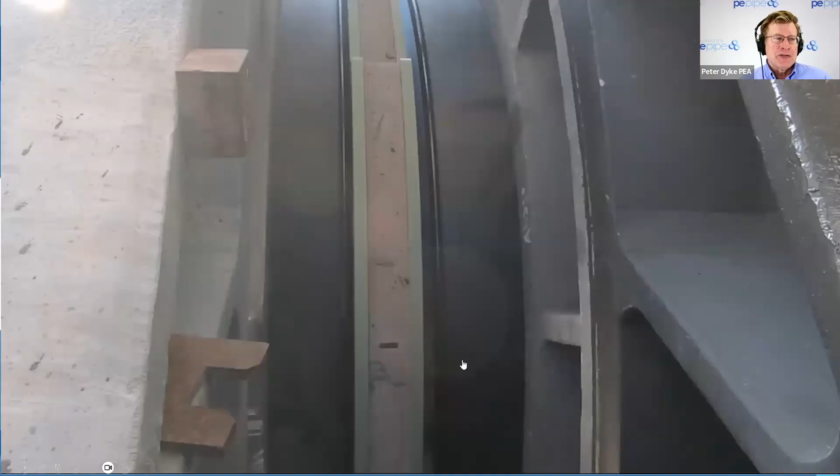If you haven't seen a large diameter fusion, this is what it looks like. We just finished the heat soak, we're pulling out that heater plate and we have like 15 seconds to close it up. So the operator, Mr. C, is inspecting it, at the same time closing the fusion zone and creating that double rollback bead. This is a fantastic example of what fusion looks like in large diameter.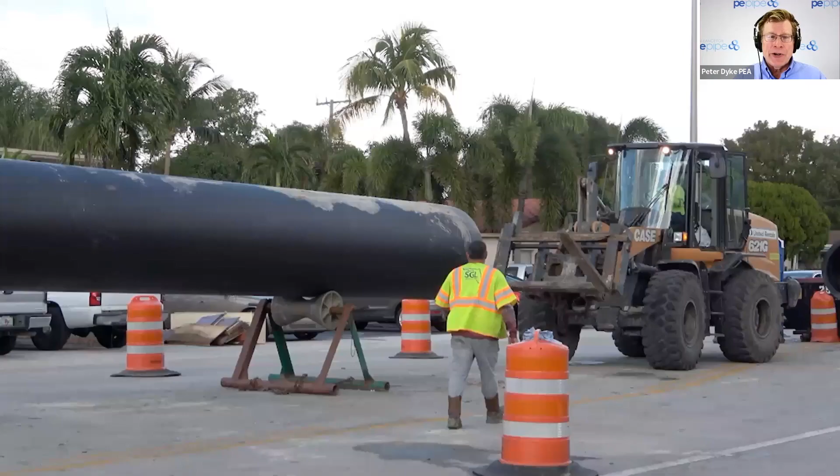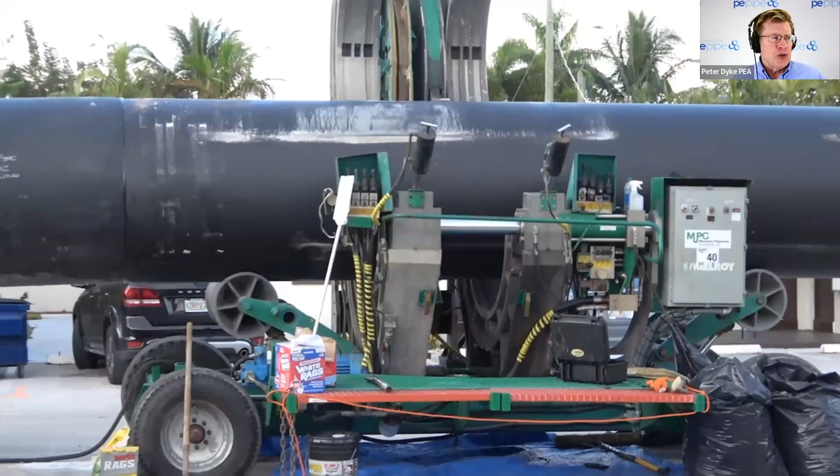The last image we're going to look at is how we move the next piece of pipe into that fusion zone. Here we've got the forks picking up the pipe on one end and pushing that pipe into the fusion zone of that large diameter fusion machine. You can see him moving that pipe, and there's a fusion joint right there on the left-hand side of your screen. Quick examples, just thought it might be interesting.

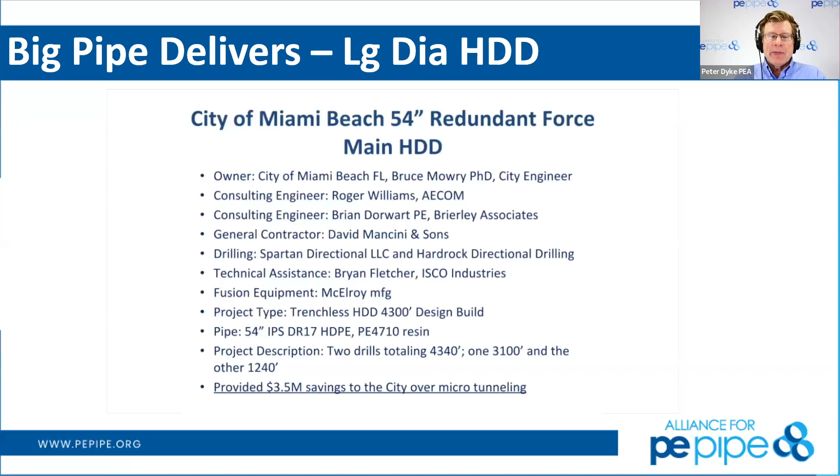This video, which we showed right at the beginning of the pre-show deck, is at 54-inch diameter, 40-foot deep, DR17, so about a 3-inch wall thickness. Deepest, largest diameter horizontal directional drill that I know of in North America. This saved a concrete line that was in the process of failing in Miami Beach.

AECOM was the lead on this, ISCO advised the design build team. They saved the owner $3.5 million when compared to a microtunnel job.

The design build team was given a year to do this job. They did it in 5 months, with actual construction being 5 weeks around the clock, done 24/7. This is now in operation.

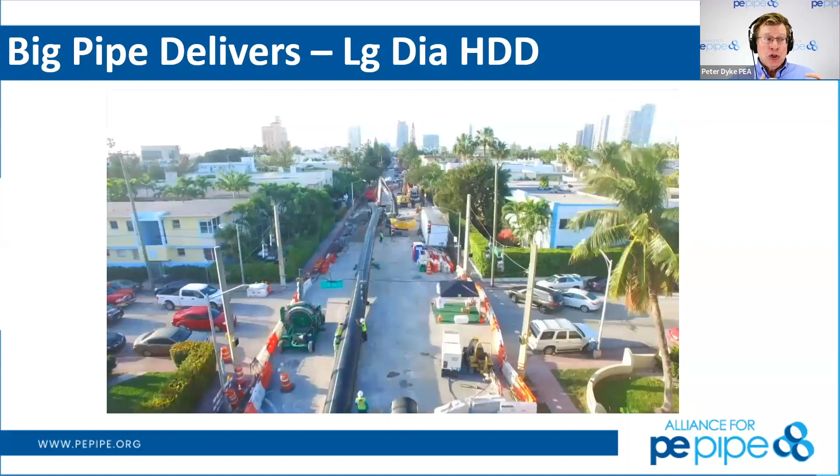At a depth of 40 feet in the island of Miami Beach, it's all limestone, so they filled that borehole up with bentonite. They had 2 pipe strings they had to connect, so they connected the 2 pipe strings while they stopped the pull, fused it up, started it up again, and away they went.

Alan, yep, this is that one pipe in, one pipe out scenario. This is a low pressure force main for the only pipe out of Miami's South Beach to the regional treatment facility on Biscayne Bay. So the next ones we've got here are some fittings.

Mike has some information for us on this, as well as getting to some of the irrigation successes that we've had. We've got about 7 minutes left.

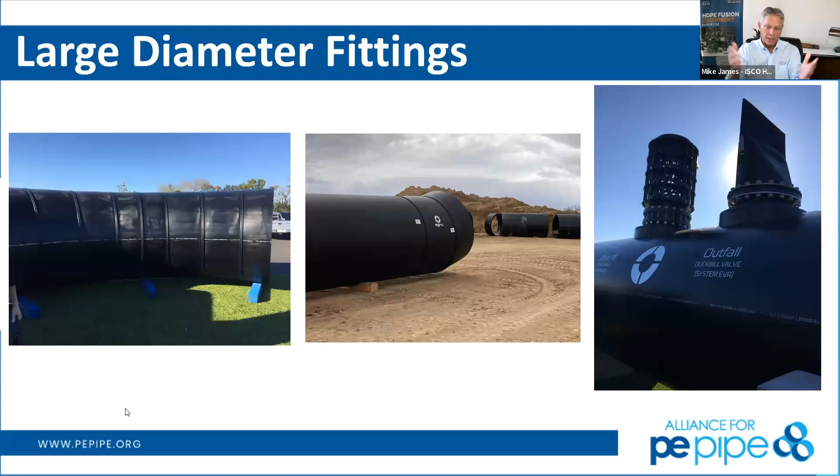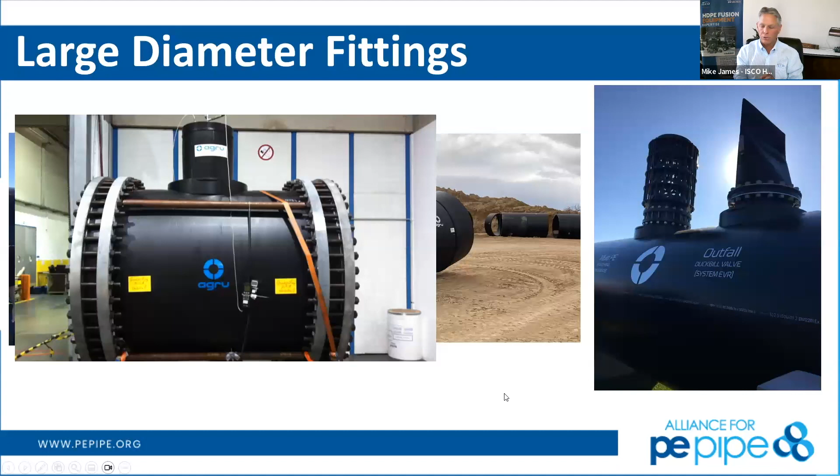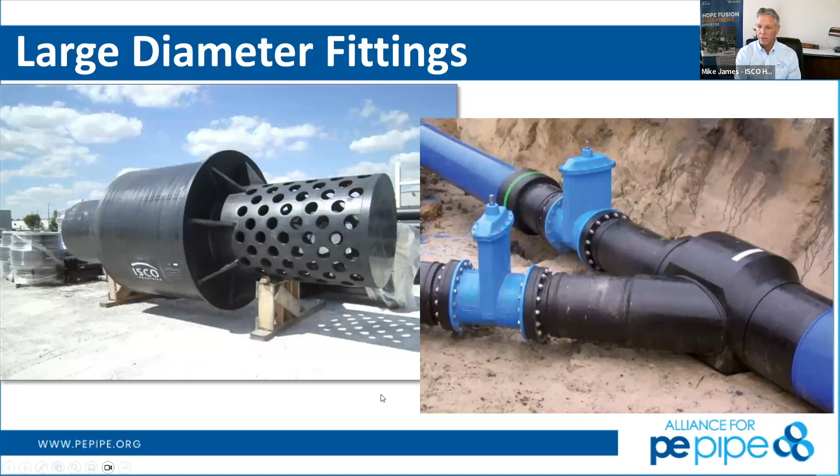These fittings we're showing you can be custom fabricated and built for what you've got. They can make just about anything you'd like for your particular project. Go ahead, Mike. Yeah, really, any elbows, T's, Y's, structures, or any fittings you need, outlets like duckbill outlets, outlets for reducing valves, pressure outlets, or anything like that, we can help you with. These are some of Matt Danish's fittings as well, at Agru. So really, we have the capability of providing any of those fittings or structures like you see in these pictures. If you can draw it, we can build it.

If I can just touch base, I know we've got some folks on that have interest on the irrigation side of things. There's a lot of irrigation canals in the West being piped today, which we need. We have a lot of evaporation, a lot of water loss in the West. So I wanted to show a couple slides.

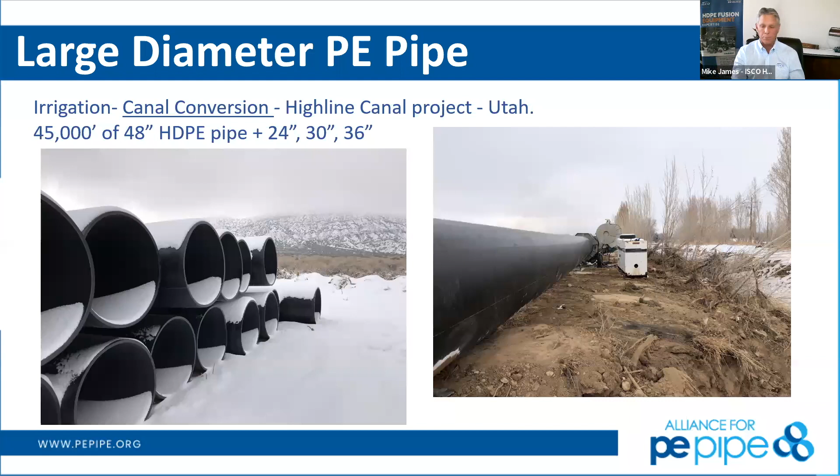This is a 48-inch project, I believe, that we did in Utah with the Kilpack boys there. It's really common for us to do larger diameter, thinner wall pipes in the West using HDPE pipe. Those are actually pretty simple projects for us.

The next picture, Matt Danish, maybe you can come on. We'll talk about Steinaker as well, because this is a large diameter irrigation canal. Matt, can you quickly chime in about this? Yeah, so this project was very unique because we had such a small footprint to work in. The easement that the district allowed was only about 100 feet from fence to fence, and we had to stay within that boundary. So, as you know, if this is a canal, it's got a lot of bends and turns in it.

One of the great things about the ISCO Talon welding machine is that we made these elbows where the Talon could walk right over them. So it drastically helped with the installation of this pipe system, because the elbows were laid down. The Talon was able to make the fuse, then walk right over the elbow, and continue that process down. We welded all the pipe up on the roadway and then lowered it down into the trench. That's one of the great things about HDPE.

Whereas if you made this out of steel, they would have to weld that steel line down in the trench where there's water and mud, and dewatering would be a constant battle to keep up with. Here we're able to weld it right up on the roadway, stay out of the mud, and the pipe then just sat right down into the trench. The flexibility of the pipe made it much easier to install. Even with some of the elbows and bends, it fit right nicely into the trench.

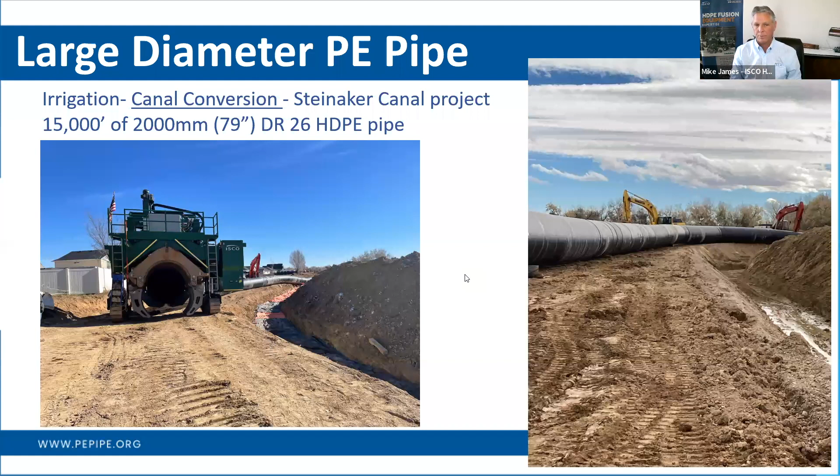So here, just that same open cut land method with some animated GIFs, proving the same point. Mike, stay on and talk about seawater and OTEC here.

Yeah, so just a quick example here. Even though this is not a municipal application, our pipes can be used and have been used in seawater air conditioning pipelines around the world, as well as OTEC pipelines.

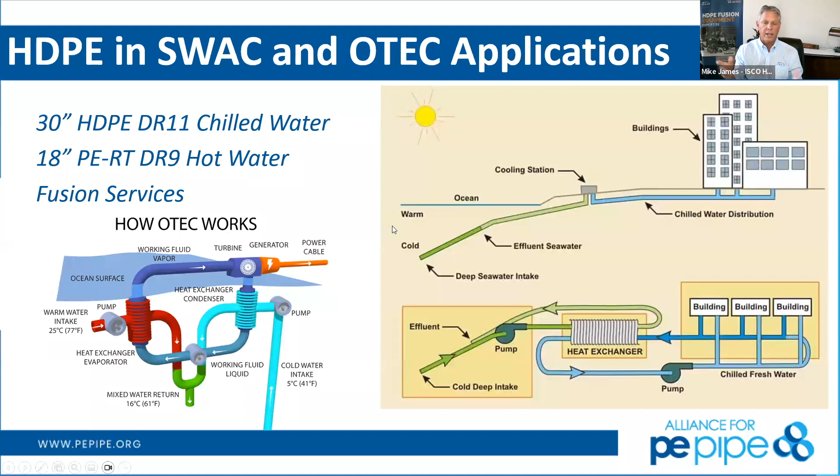There's not that many OTEC projects, but they're being developed, and it's all offshore. If you go to the next slide, OTEC on the left, SWAC on the right. Don't need to get in the weeds on them, but they're both taking cold seawater, 40-degree seawater, bringing it up to the surface, either making power with it using the OTEC method, or taking it to a land-based heat exchanger and using it for air conditioning in large buildings and complexes.

Great application for it as well. How are we doing on time? We got only about 3 minutes left.

This is another ISCO project, a Clover Force Main, 48-inch DR21, 3,300 meters, quite a substantial amount of pipe installed. We're trying to minimize the actual footprint of our construction altogether, which helps us be more cost effective.

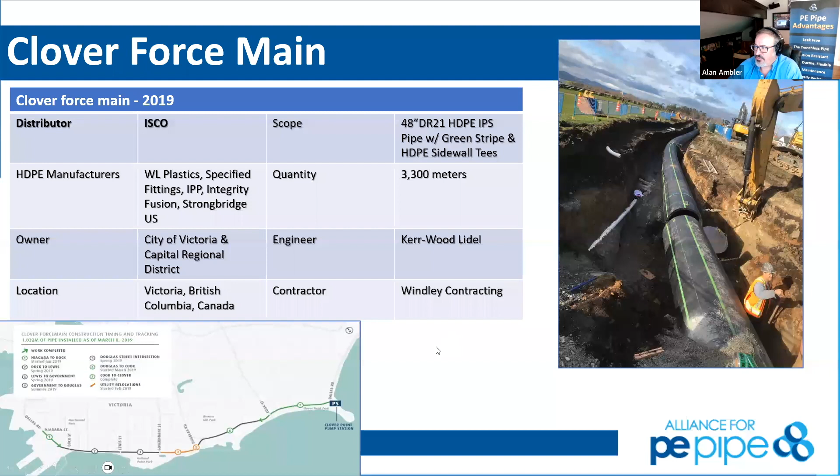In-ditch fusion right there. That's a perfect application for an in-ditch fusion. So Scott, there's another answer to your question as well.

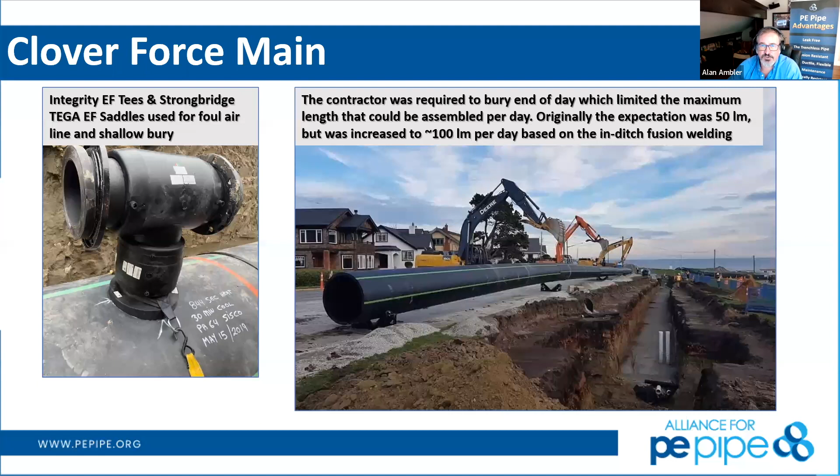We'll start to see saddles and other things being used for foul air or air release valves, which is very important in force mains as we go through. Contractors change the way they do business to increase productivity. Once they look at how long of a run they could pull together successfully in advance, they make sure they're more productive.

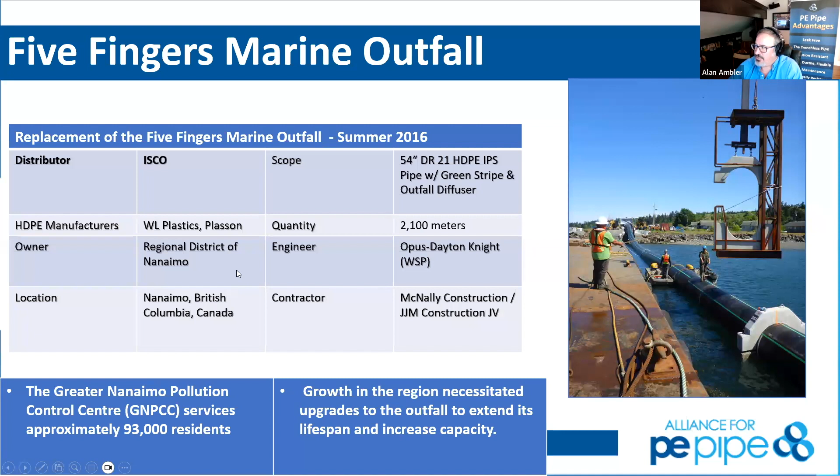Additional information here that has fabricated fittings through it, project after project after project of successful installations. This one's a marine application that had to have custom fittings as well. Again, more of that ocean water exchange where we're using the depth of the cold water to change heat transfer to push us through for air conditioning.

Richard, you've got about 30 seconds. Just real quick, notice all those ballasts that hold that pipe down. You can calculate that weight for the ballasts and the distance apart. When you fill that pipe full of water, it'll drop to the bottom of the ocean. If you need a repair, you can pump it full of air and it'll come to the surface again. It's kind of interesting to see those ballast blocks on there with the pipe still floating. Really interesting technology.

One final question, Alan, as it relates to those large diameters in the trenches. What kind of bedding are we using? What kind of backfill? Can we use native material? What are the rules? That's a great question.

The bedding itself needs a foundation free of rock, large rock. On very large pipe, we're talking bigger particle sizes. A 6 to 8 inch pipe would use 3/4 inch. Anything above 16 inch, we're looking at 1.5 inches. Richard was showing us the bible on earthwork installation, pipe installation by Amster Howard. We can basically put 57 stone, a standard 3/4 inch stone, around all of that pipe, making sure it's properly compacted as we go through.